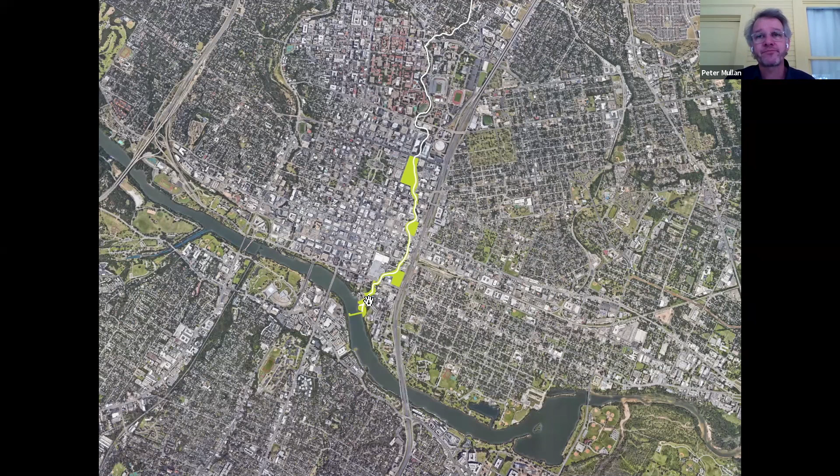We've been talking about Waller Creek as a community for a long time. I don't know if Sinclair Black is in the sessions today, but in his drawing for Austin's creeks in the 1970s he identified Waller Creek as a place for public infrastructure and a mobility corridor. So we've been talking about it for a long time, but really the game changer in this generation is the Waller Creek Flood Control Tunnel, completed in 2015, which now takes 28 acres out of the floodplain on the east side of downtown and enables us to rethink the relationship of Waller Creek and the public realm around it with the surrounding city fabric.

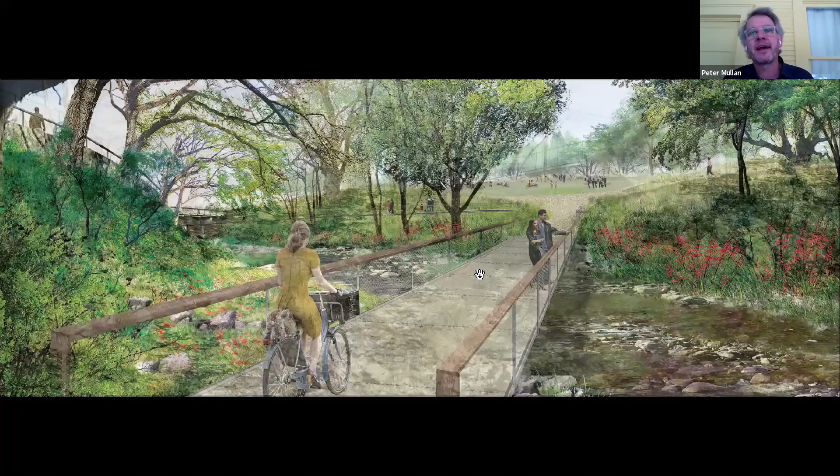Broadly speaking, the building blocks of this project overall are the following. It starts with ecology and the creek itself. The creek has been mistreated and neglected over time - it's probably the most urbanized creek in Austin. You can see how it's been forgotten or in some cases walled off from the city due to the history of flooding. Now that we have the flood control tunnel, we can completely rethink that relationship: take those walls out, bend those slopes back, revegetate them, rebuild the stream bank as a place of nature, and open it up to the city around it. At the heart of the project, that's what this is about - reconstructing nature in the middle of an increasingly urban place.

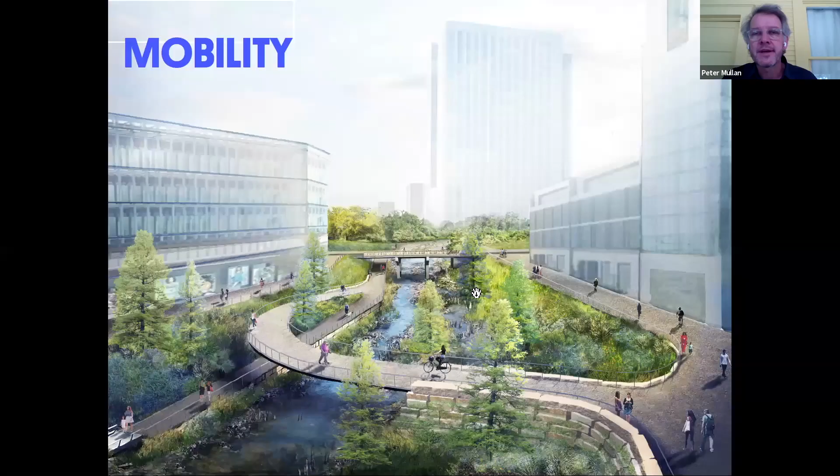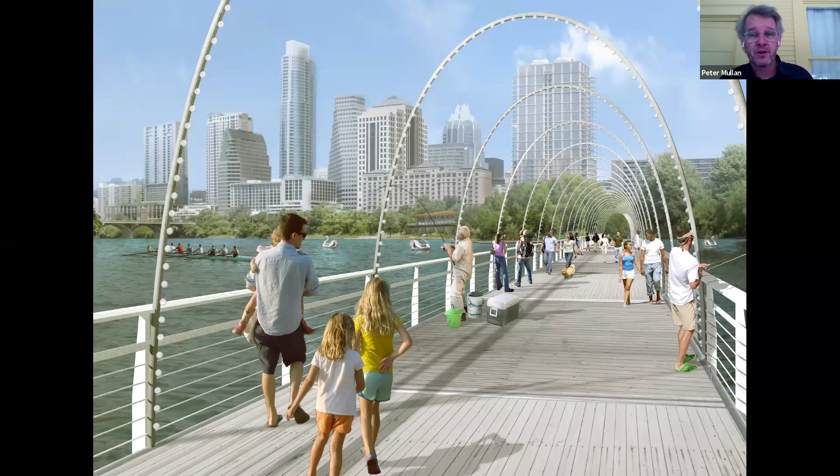The second layer is about mobility and connectivity. Along that natural spine, we're building a continuous pedestrian and cycling trail that avoids conflicts with the street grid, allowing a new alternative mobility infrastructure in this part of the city. It includes a new pedestrian bridge over the lake at the southern end of the Waterloo Greenway Trail. Originally this was designed to be a pontoon bridge - we'll see if that pans out. We're actually collaborating with Cap Metro right now on incorporating this into the plans for Project Connect, for a transit bridge across the lake. I'm excited about Project Connect, as I know everybody on this call is, and will be out pounding the pavement on its behalf. We need transit - now is our time. Little plug there. But we're incorporating this pedestrian mobility infrastructure into that as well.

If you were able to connect to the larger urban trail network in Austin - it's hard to really understand how profoundly these pedestrian connections can change the perception of the city, because they have the effect of essentially shrinking the city in people's minds. Nobody's walking from UT to the lake right now, or to South Austin. But when there is a shaded, cooler, beautiful public pedestrian walkway to make that connection, people will use it. And then it changes everything that happens in between those two destinations. So the possibility of creating this, and the impacts it can have, really cannot be overstated.

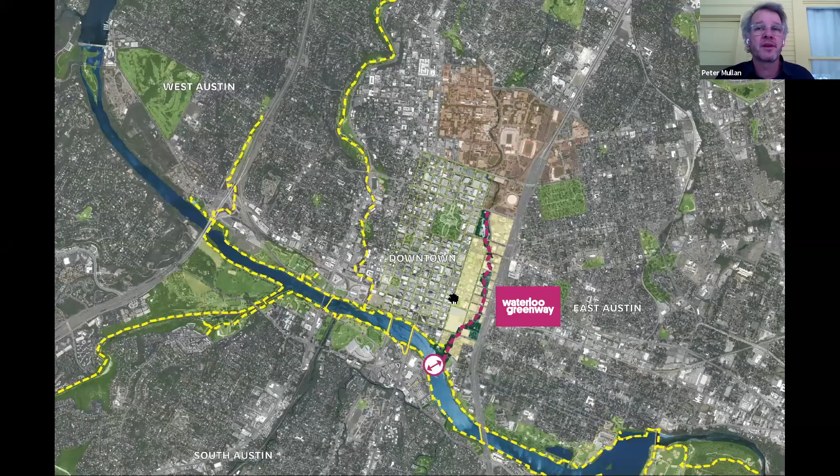So we've got the ecology layer, the mobility layer, and then that spine - that green and mobility spine - connects a series of places and parks along the route, two of which are existing, Palm Park and Waterloo Park, and two of which are new and will be created. Each of these parks has a different character, function, sensibility, and context, but the sum of all of which really creates this rich tapestry of experiences that allow us to serve a diverse public in a diverse set of ways.

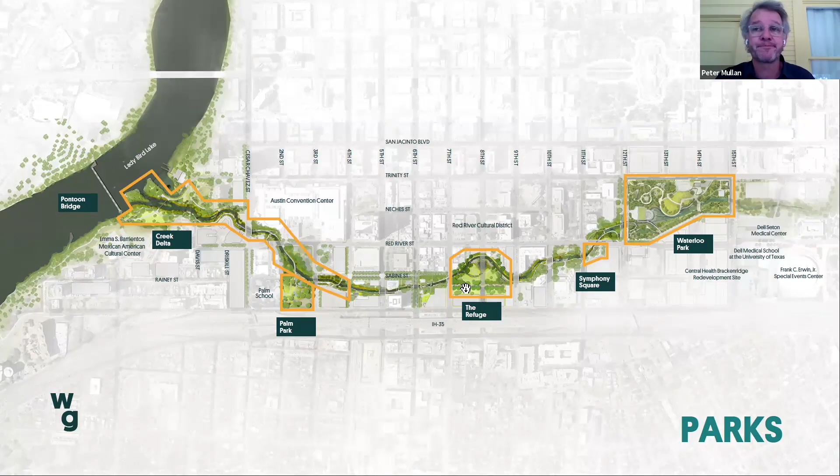And the beauty of parks, as you all know, is that they're so adaptable - they can do so many different things, and they can be places for events and gatherings. It's always a little disconcerting to see these kinds of images right now, but I firmly believe we'll be back into this mode at some point, and we have to look forward to that. Symphony Square is a collection of historic buildings on Waller Creek that's part of our system, and we renovated those buildings in 2018 and have brought programs and events back to that space.

Our organization is not just about building parks and operating parks, but also activating them and programming them, and using programming as a way to make them more inclusive and welcoming.

Creek Show, which some of you on the call may have participated in, is our largest signature program that we have every November. We won't be having it this year, unfortunately. But we commissioned artists and designers to do light installations on the creek, and it's really given people a way to see the possibilities of what can happen along this public corridor. Last year we had 60,000 attendees.

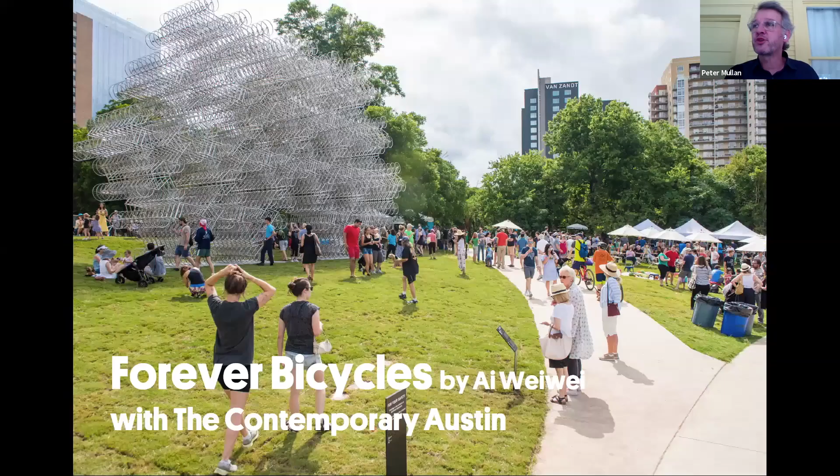Public art, huge part of our program. We have started commissioning works, including Forever Bicycles by Ai Weiwei, which we installed in collaboration with the Contemporary down by the Waller Creek Boathouse in 2016.

But in addition to all that, these parks are places for quiet contemplation and being in nature and just being connected to nature. We've seen the incredible health and wellness benefits, particularly so in the last few months, of these kinds of opportunities and experiences. So in many ways, we see this project as a very large public health initiative that is crucial to the future of our urban city.

And then in between those two poles of large gatherings and private moments, there's everything that you can imagine in between, and everything that you can't imagine. The beauty of parks is that people make them their own. They don't do what we prescribe for them. They do what they want to do, and that's their beauty, is that they are these kind of open-ended platforms for the collective creative expression of the community. That's really our goal: how do we actually make this a place that can serve that purpose and design it in a way that facilitates that.

Over the course of the past few years, we've also recognized that we cannot look at that as a passive activity, and that historically these parks and places have not always served the public equally or equitably. We as an organization need to be very conscious about those disparities and do what we can to overcome them, so that this is a place that serves everybody and welcomes everybody. To me, that's their real value: if this is a place where the entire community comes together, that's how we build a common sense of our humanity and community, and our connectedness to each other. That's part of why having this broad sense of a constituency across the city is so important to us.

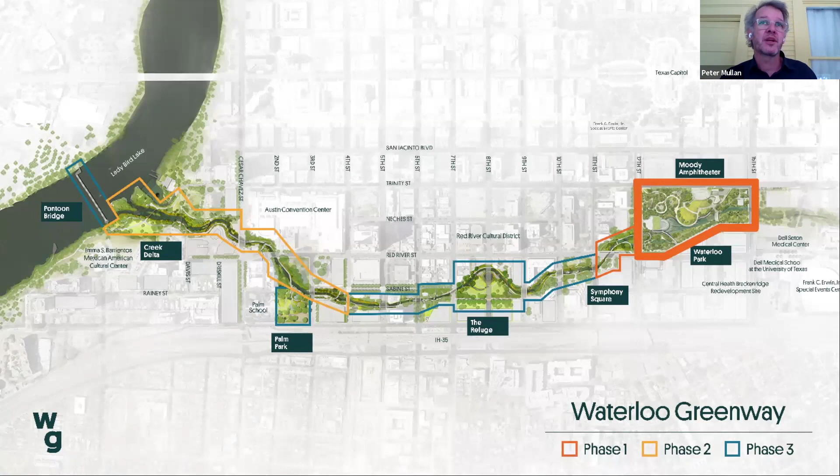So that's the big idea: ecology, mobility, park spaces for coming together, and doing that for the entire city. In terms of implementation, we have a phased capital project. We're under construction on phase 1 up at Waterloo Park at the northern end. We are already in construction documents on phase 2 at the southern end. So we have a kind of rolling construction process. We hope to be in construction on phase 2 next year, with the goal of having the entire project complete by 2026, 2027.

One of the reasons we started at Waterloo Park at the northern end was that it has all of the different components of the larger project embedded in it. There are large gathering spaces. There are areas where we're restoring the creek. And there are park spaces of a variety of scales and sizes that allow us to serve the public in a variety of ways right out of the gate.

So in some ways, as a demonstration project for the larger project, this is a way to show people what's coming. We've frankly realized that for a large part of our community who don't read plans and architectural drawings, having a place that they can experience is going to be the thing that changes the perception of the project as a whole. So really looking forward to sharing this with the public generally and broadly.

So I want to go through a little bit of history of the evolution of the design. It's pretty interesting to see how it's evolved over time, and I think you'll see some of the themes that emerge in that development. Let me go back because I forgot to mention: part of the center of the project is the Moody Amphitheater, which is a fully functional 5,000 person outdoor amphitheater.

So we have a programmatic anchor, which I think will also attract people from a larger radius around the center of Austin. That's one of the themes embedded in the evolution of the design: taking a place that was, consistent with some of our historic parks in Austin, not intensively designed. We find these public spaces with natural resources and features, but we've never designed them as urban places. So part of the goal around Waterloo Park is to create a truly urban park that has a lot of features, amenities, and experiences packed into a smaller footprint.

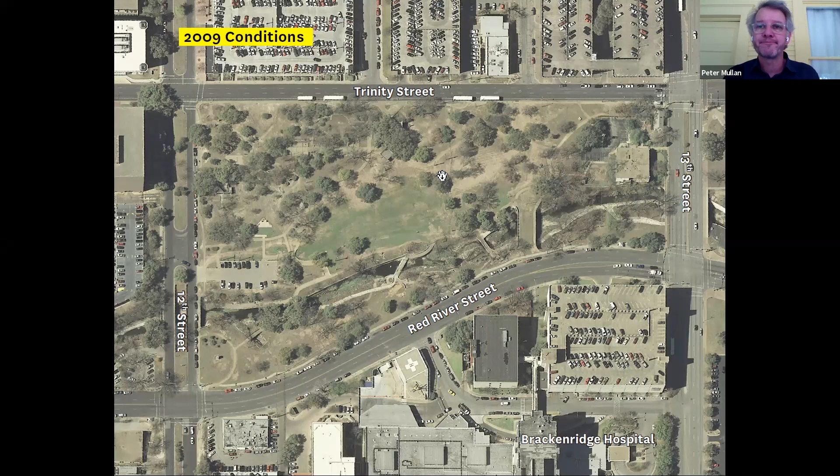This site is the site of the inlet facility for the Waller Creek flood control tunnel. Again, this is kind of the pebble in the lake that has a series of ripple effects that inform a lot of what we're doing.

It's a giant piece of infrastructure in the middle of the park, and a lot of the design is about how we respond to that and also get inspired by it. Waller Creek is about flow and the flow of water, but landscapes are also often really about flow—the flow of surface through space in three dimensions. The tunnel, in some ways, is like this thing that has interrupted the natural flow of the creek and the landscape, but that spawns a whole series of geometric and programmatic reactions.

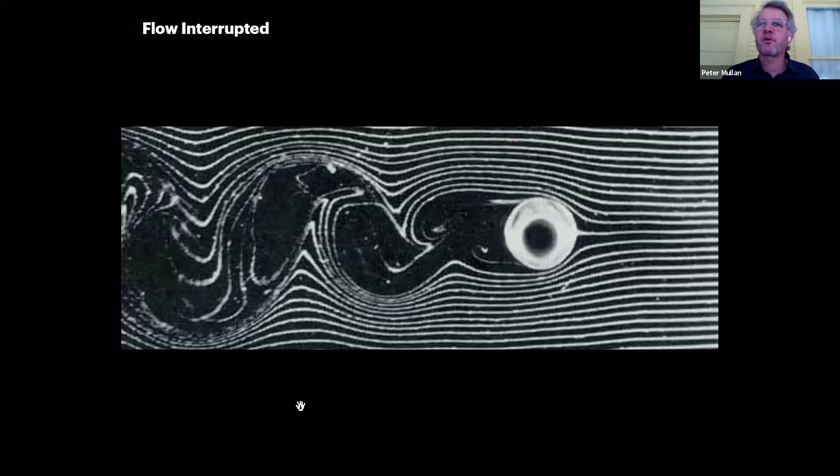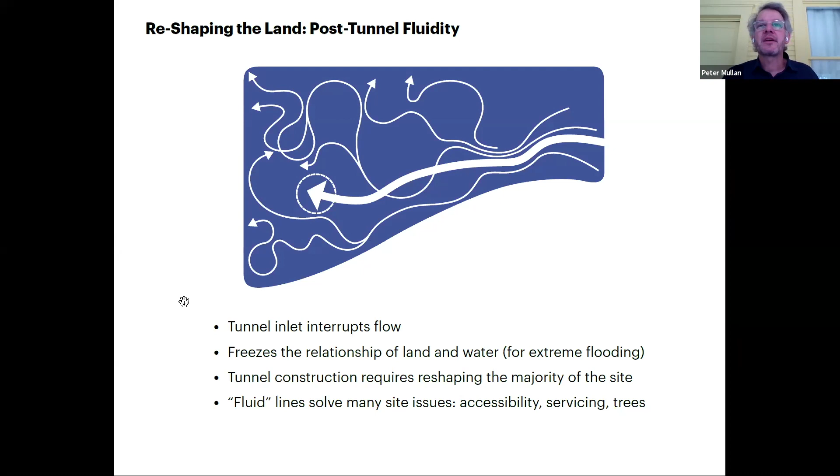The idea is that out of that interrupted flow come a series of pathways that meander their way through the site fluidly, and those pathways then create a series of places—kind of eddies along those paths—that both navigate the topography and create programmatic opportunities along the way.

So, going through a bit of history on the evolution of the design. I actually want to thank Ingrid for this opportunity, because you don't always get the chance to get into this level of detail in the design process, and I thought this was an audience that would appreciate it.

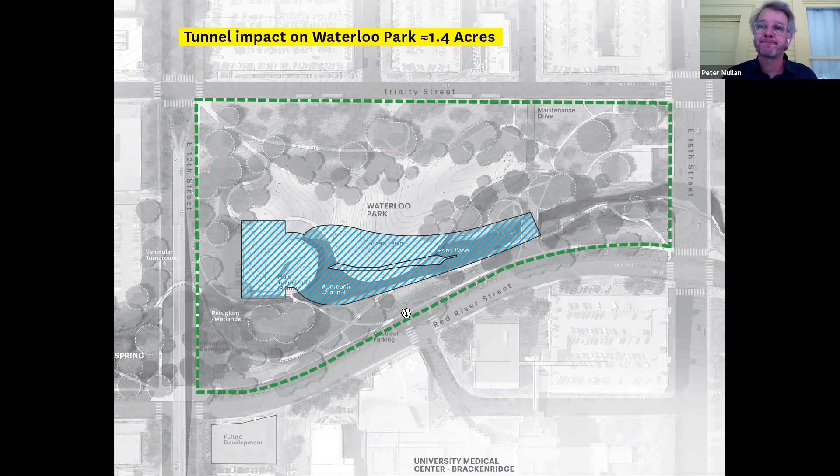So this is the park overlaid with the tunnel construction, with the inlet facility, and then the pond that flows into the inlet, into the tunnel. The first big move the design team came up with was basically to build the park out over the pond, to kind of take the park back from the tunnel. So instead of having a piece of infrastructure with a bunch of green around it, we now have a park with a large piece of infrastructure in it.

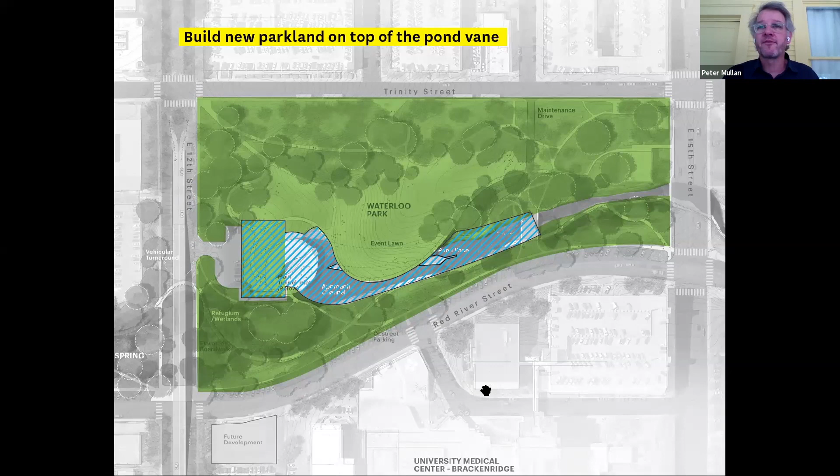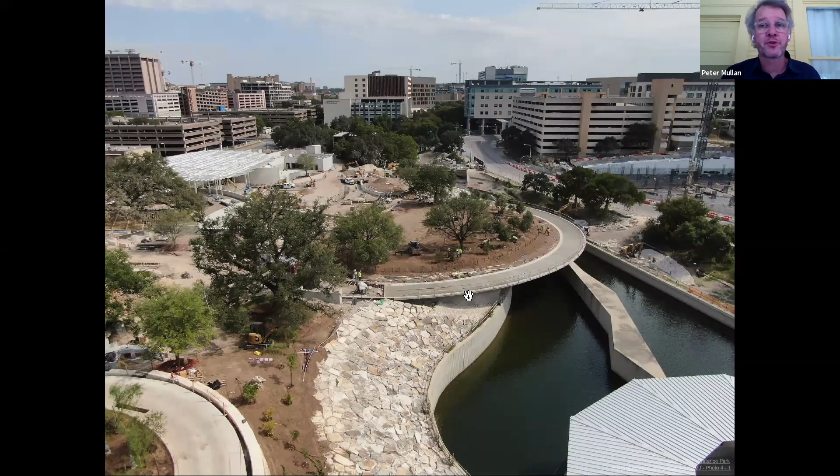So inverting that relationship—here you can see the lawn, the flying lawn that extends out over the pond, the disc-shaped lawn that's now complete, and there it is from above. Really, again, taking the park back from the inlet facility and creating a whole series of other programmatic opportunities. Once that move was done, the question was how do we actually carve out spaces within the park, knowing that this is the biggest park in the chain, that this could be a gathering space for the center of Austin.

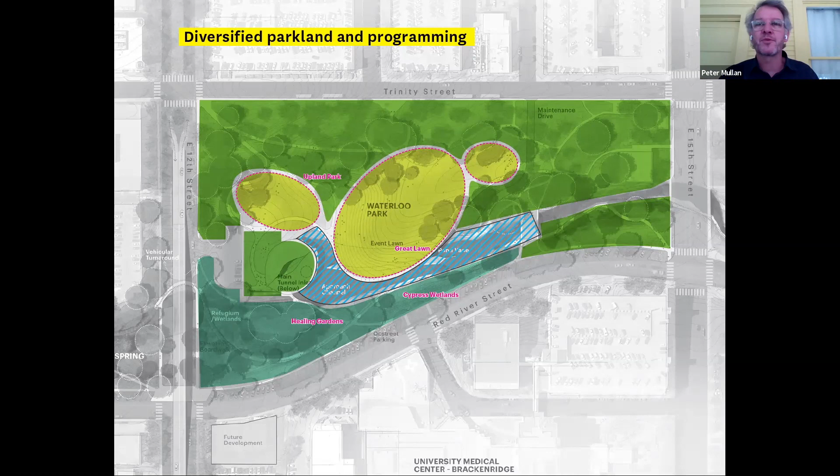I've been reminded by folks who worked on the Music Commission back in the 90s that people have been talking about a 5,000 person amphitheater in downtown Austin for a long time. So we were happy to be the recipient of that vision, and also the idea of creating an architectural anchor in the park that could have symbolic value.

That would mark this place and make it a destination architecturally. Out of that was born, in the competition design, Tom Phifer's vision for what was at that point called the Poppy, which really was a sculpture as much as anything else, a place for gatherings, but without any specific programmatic function—just the idea of a visible architectural element in the park that would be an attractor. That was the genesis of the idea of a piece of architecture in the park.

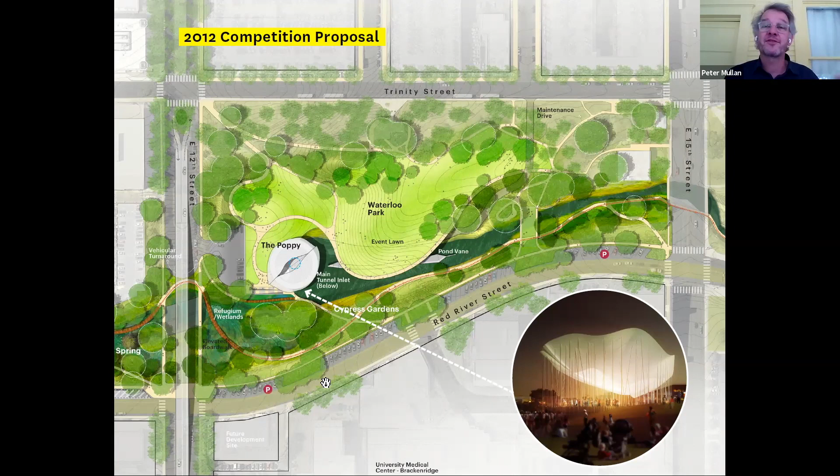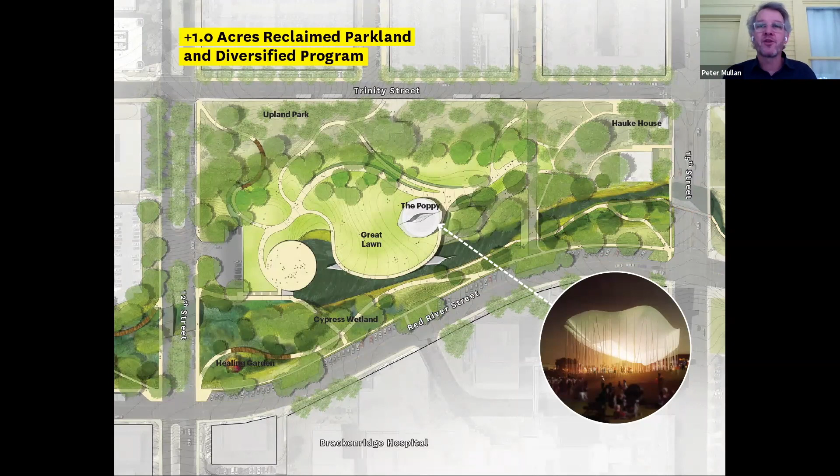Over time that has evolved both in terms of location and function. It started out on top of the inlet facility in the competition, in part to hide it, but that wasn't possible functionally or programmatically—we know the inlet facility has had some history. So then the Poppy started to move, and we saw a whole series of progressions in the development of the plan around the location and function of that architectural element.

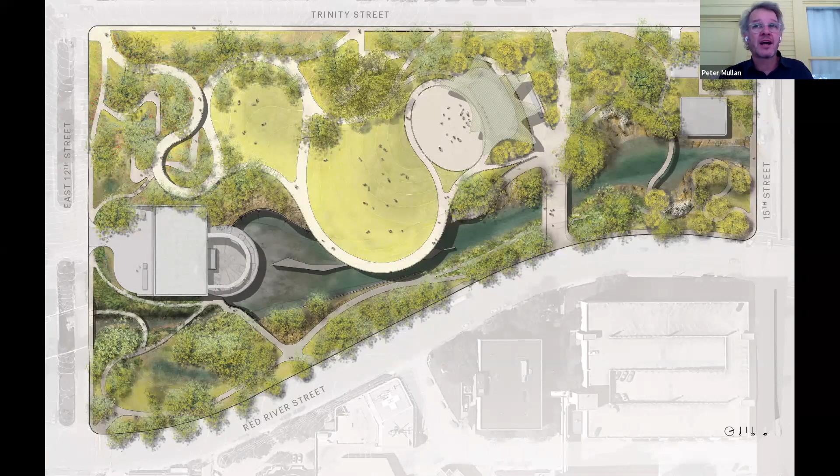Jumping ahead a couple of years, the Poppy had transformed into something a little flatter and started to gain more programmatic functionality, recognizing that just having a pavilion was great, but having one that could actually host concerts and performing arts events would be better. So this idea emerged of an organic, distinctive leaf-shaped structure, essentially a tensile fabric covering around a steel frame built on a series of large pillars.

One of the things you can see is that this is still very much just a shell—it's not a building yet. It's kind of floating in the landscape, and the landscape is very Arcadian and beautiful, but hasn't really come to terms with the programmatic realities of being a performing arts space.

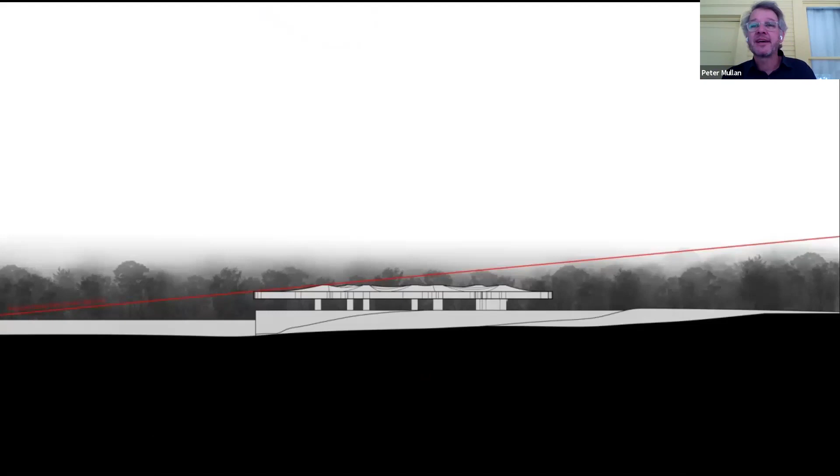The other thing is that as that was being developed, we recognized we have to deal with the Capitol View Corridor, which limits the height of the building. So the idea at the time was that this building would actually be on hydraulic lifts, so that during park mode it would be below the view corridor, but for a show the whole structure could lift up to provide the height and functionality required. Once we dug into the legality of that, we realized it was questionable within the state's Capitol View Corridor ordinance, so we had to rethink things a little bit.

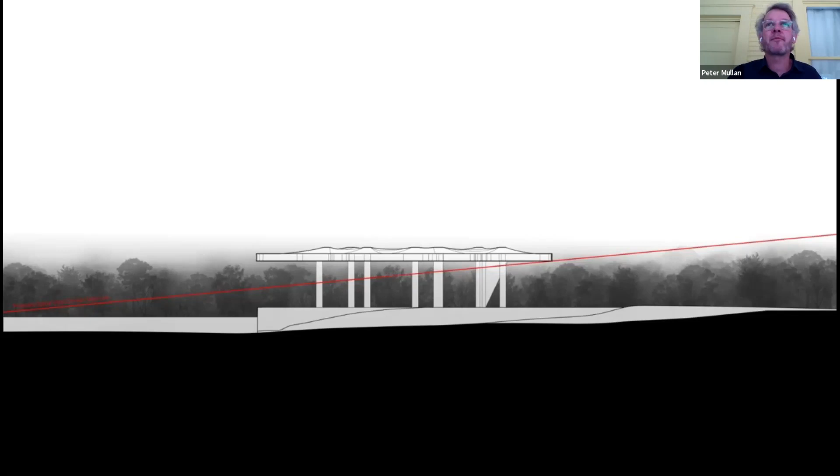We also realized that if we're going to build this kind of facility, we should really do it right. The thing missing in Austin is a performing arts venue with infrastructure built into it. We have a lot of spaces where we do festivals and bring out temporary infrastructure, but that tends to have a really destructive impact on our parks. So if we could build in some of that infrastructure permanently, it would facilitate the performing arts program and reduce the impact on the park itself.

That led to a couple of things: the development of the amphitheater as a building, and moving it slightly north along Trinity Street to maximize the amount of height we could get underneath the view corridor. That became the defining element for the location of the amphitheater and the development of the building around which the landscape could be shaped.

That's a bit of an overstatement, because one of the hallmarks of this whole design process is that the building and the landscape are really integrated as one. That's been a primary goal for us all along, in part because we wanted the landscape to always be the primary experience. So the building had to function sort of as a piece of landscape, but also so that when we weren't in show mode, it wouldn't feel like a place that was empty, lost, and forlorn.

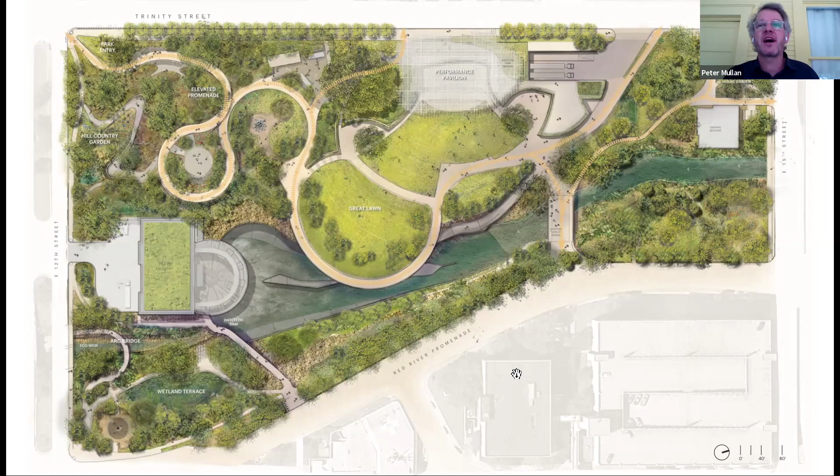That really felt like it was part of the park. So this idea of a park-first design strategy emerged.

I want to talk about the evolution of the amphitheater building and its architecture. This is the roof plan, and underneath the building is a plan that includes all the functionality for this kind of program: green rooms, dressing rooms, bathrooms, concession areas, loading dock, crew areas, catering, etc. All of that is built underneath the landscape, embedded into the topography of the site.

That allows us to create a whole series of roof terraces and landscapes that cover it on top, and those are all occupiable, so the building becomes part of the landscape and a landscape unto itself.

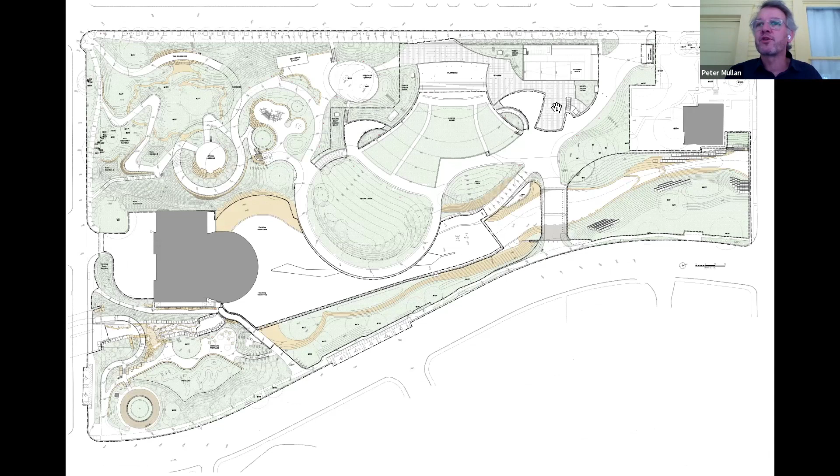This is the landscape plan that is being built. You can see the Great Lawn in the middle and the outline of the amphitheater building. Much of it on the south side of the site is built into the hill, and then it starts to emerge out of the hill on the north side with the loading dock and these roof terraces.

The form of the amphitheater structure has evolved quite a bit over time. The inspiration was really how do we create something that can mimic the effect that the tree canopy has in the park, allowing light to filter through it so that it's a kind of ephemeral thing and not a big, heavy structure.

Looking at some art for inspiration on how to take that idea and abstract it. Agnes Martin and her incredible canvases that have, in spite of their minimalism, this incredible depth and a way of capturing the light and refracting it.

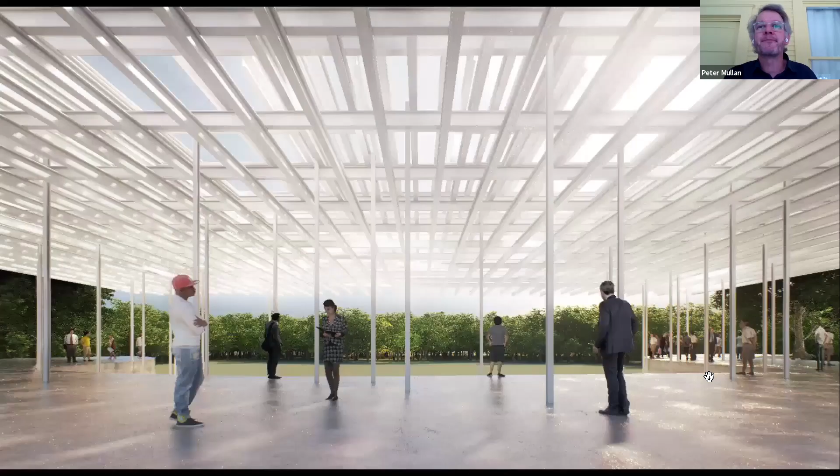So the building and canopy structure becomes almost like a light fixture itself, taking that abstracted tree canopy and making it into architecture. But when you get far from it, it's something that is floating, a little bit like a cloud. We're trying to dematerialize the architecture as much as possible.

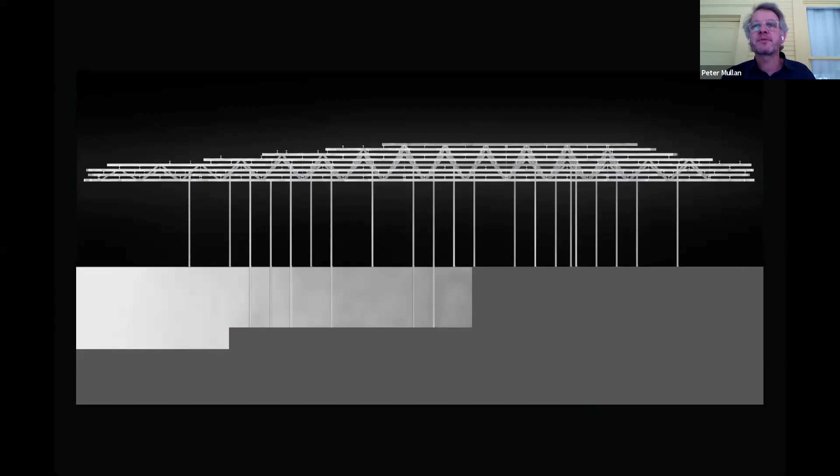The scheme was to create this multi-layered trellis of steel beams, actually 16 layers stacked on one another, using very small individual members so it has a kind of delicacy—6 to 8 inches in depth—but combined together they could provide the structural capacity both to make the necessary spans and to hold up the rigging and equipment required for performances.

That structural methodology and typology also allowed us to be playful about the shape of this and more organic about it, looking at different ways the plan profile of the amphitheater structure could adapt and respond to the landscape around it.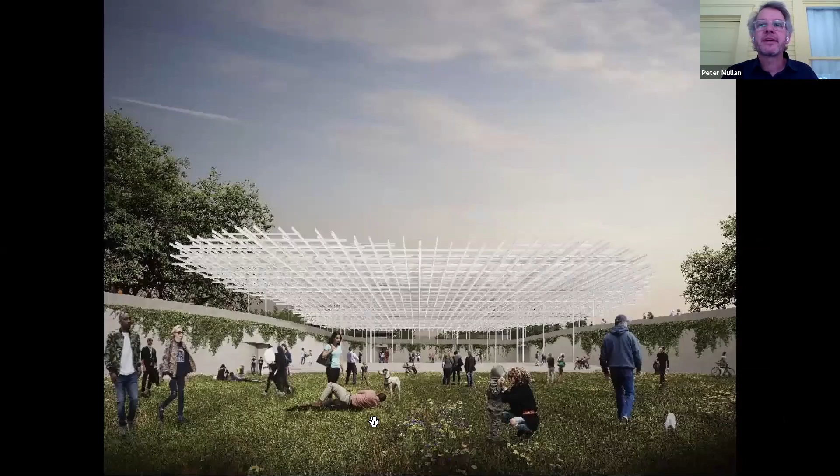We ended up with this organic form that hovers over the base building housing all of the programmatic functions of the amphitheater, but it becomes a park pavilion usable by the public all the time, not just in show mode, but as part of the park.

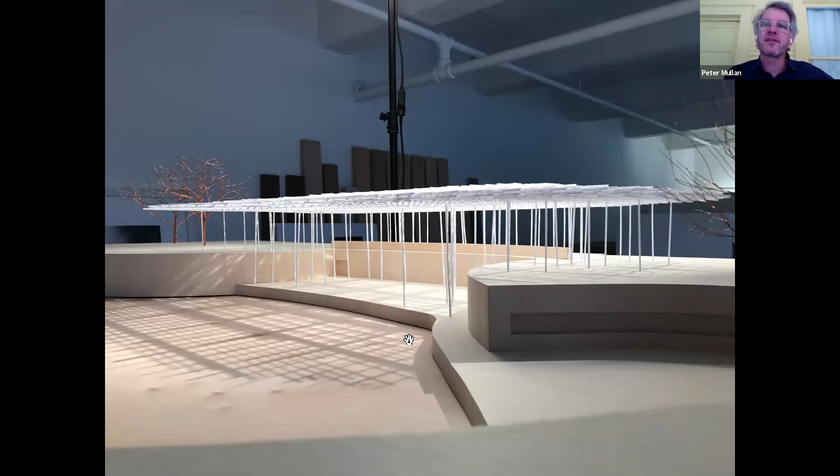Here are some model shots, all done by Tom Phifer's office. You can see how this structure allows us to have a very thin profile, which was about getting underneath the Capitol View corridor, and how it starts to capture the light and how it looks from different angles. On site you have the ability to see these different views of the structure—it's visible from all sides.

We're under construction. This is a recent photo from a few weeks ago—you can see the canopy structure that's built, the curved concrete walls of the building underneath housing the different spaces, and the landscape around it.

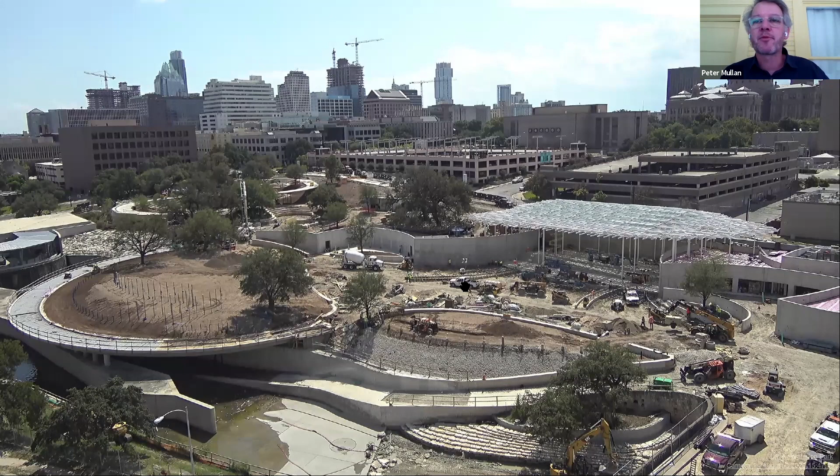I got a lot of construction photos, so I'll take you through the site. We're in the shadow of the Capitol, a pretty spectacular site here—somebody said it's a little bit like the backdrop at ACL, but in reality.

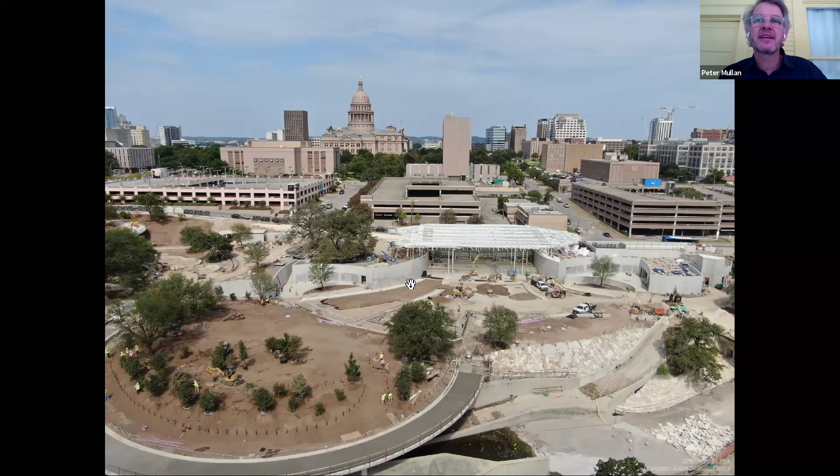This is taken from Monday, and you can start to see that a lot of the form of the amphitheater area and the great lawn are now coming into shape. We're putting in soil, and trees are being planted, so the form of this is really now finally coming together.

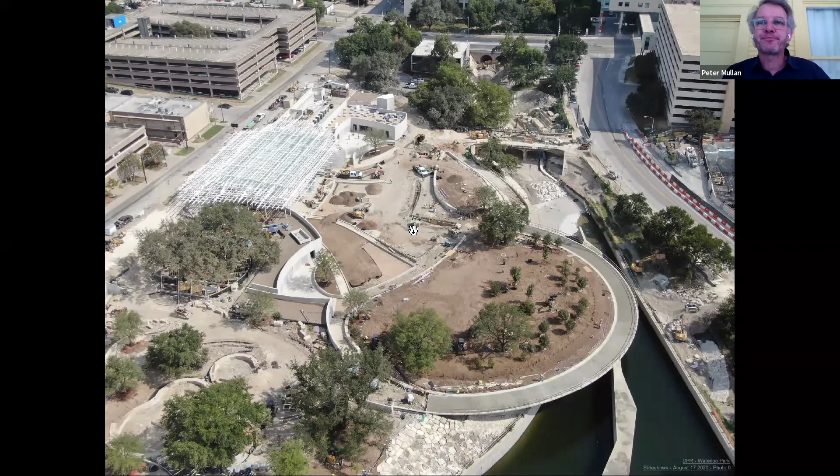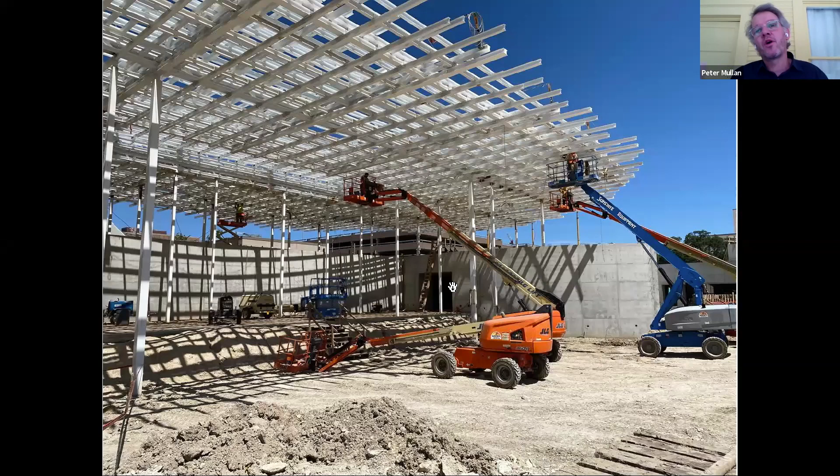Here's a view of the structure coming in off of the 14th Street Bridge, with the concrete walls underneath. You can start to see the play of light coming through the structure and within the trellis itself, constantly changing depending on time of day and where the sun is. Sometimes it's backlit, sometimes lit from the front. Because the walls underneath are curved, you get these warped shadow effects, which are really beautiful. This is a view from one of the roof terraces looking down onto the stage.

All of this will be open to the public during normal park hours, and when we have a show, we'll put up curtains around the stage to screen off the performers from above. There are stairs and a ramp that come down off the stage onto the lawn, so again the stage is publicly accessible during normal park hours.

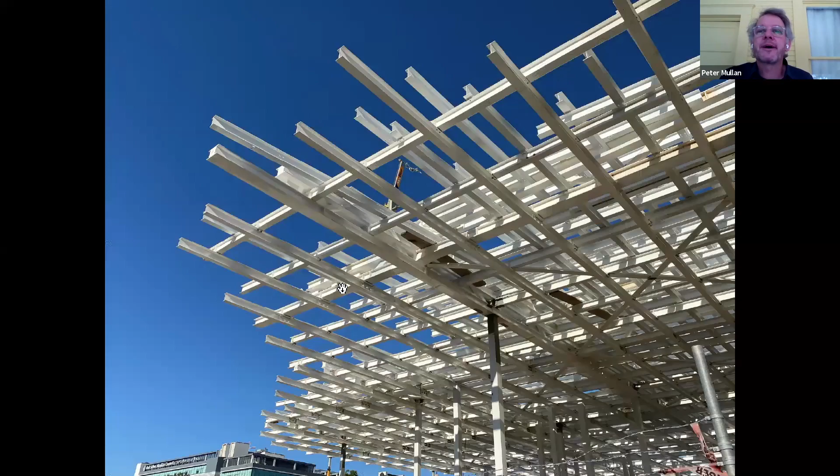Again, you can see some of the details of the structure and how it floats above those curved walls. The curved walls, which will have vines growing up them, really just become part of the landscape and part of the earth.

One of the great things about construction is some of the details of the experience that you really never talk about during the design process emerge as well. Seeing the shadow of trees being cast onto these curved concrete walls is not a view we ever saw during the design process, but just really beautiful moments that can now be experienced on the site.

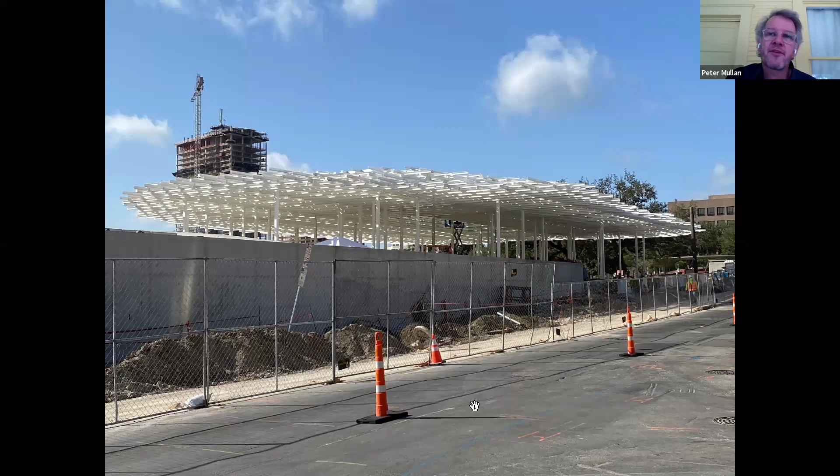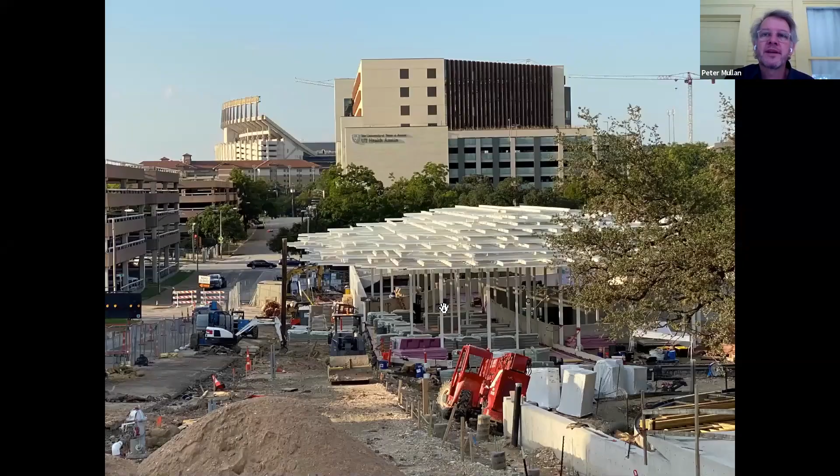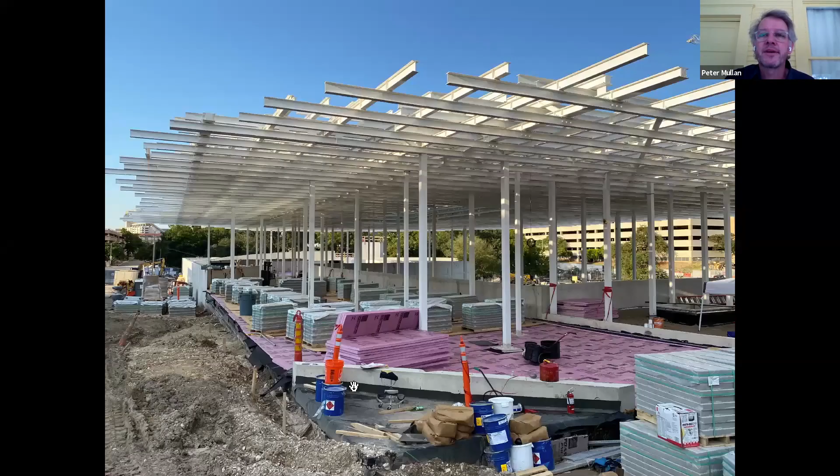As I said, there are all these different perspectives you have on the structure. This is from Trinity Street looking south, and you get this view from underneath, this sort of floating cloud with the light coming through it. But from the south looking north, you're actually above it, and you get a totally different view of all these individual beams with the UT football stadium in the background. In the middle, there's an at-grade connection with Trinity Street onto the roof of the building.

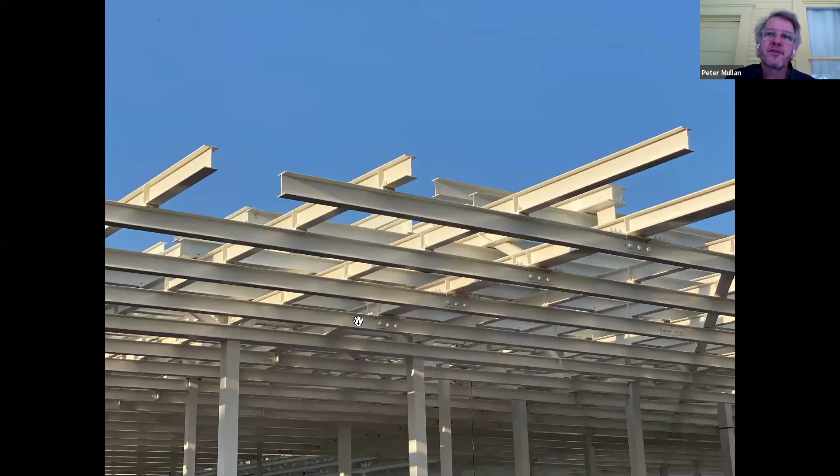This is one of the entrances into the park, where you come in underneath the structure, and there's a series of stacked beams. As you get closer, you really understand the dimension of those, and there's a much more intimate feel. But then at night in the sunset, the canopy gets lit up. All these little beam edges get lit up, and you start to see the three-dimensionality of the structure.

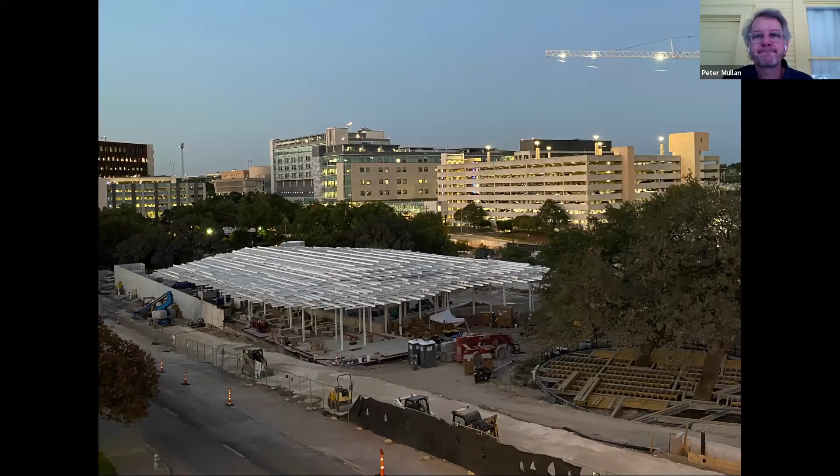So that's the amphitheater part of the park. But then to the south of that, there's a whole other experience, which is about something completely different from the amphitheater itself. It's really about being immersed in a landscape at the same time that you're in the middle of the city.

We have a lot of topography on the site. There's a huge elevation drop from Trinity Street down to the creek, and the design is really centered on taking advantage of that to create a really rich variety of experiences of the landscape. So there's this curved serpentine walkway that curves through the site, I'll show you some more images of that, which then defines a series of places along the way.

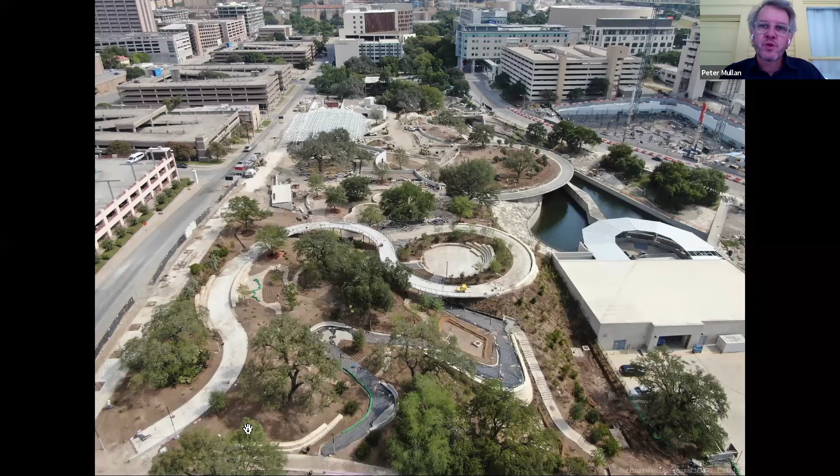There's a secondary path that winds its way down through the hill. Again, all of that is accessible to create an easy way of navigating this very steep hillside. But everything else in between is all planted as a really rich, robust landscape, and we call this the Hill Country Garden—this is really about how do we bring the hill country into the city.

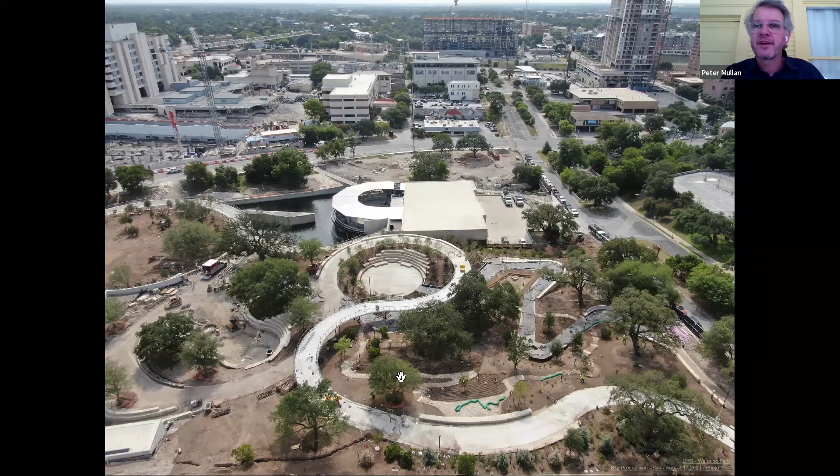Here's another view of that same garden looking east. That's the inlet facility in the background with the walkway coming down, and then the Hill Country Garden here. We've got a critical mass of landscape here that will, in certain places, let you lose the city entirely. I think this will be a really powerful experience to step out of the city and be in this really lush landscape.

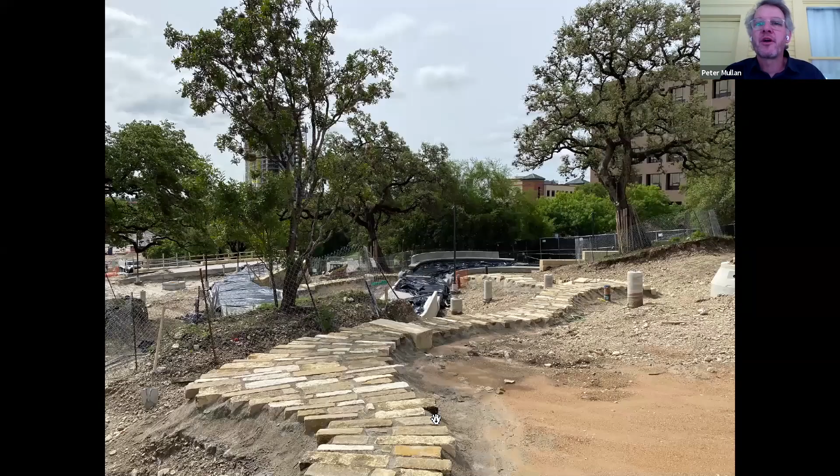There is what we call a limestone scramble that weaves its way through that landscape, really for kids, as a way of experiencing and exploring through that landscape. We also have a series of lighting in the landscape so that it can be lit and experienced at night. We're downtown, so we know we have a nighttime experience, and that's part of the landscape experience as well.

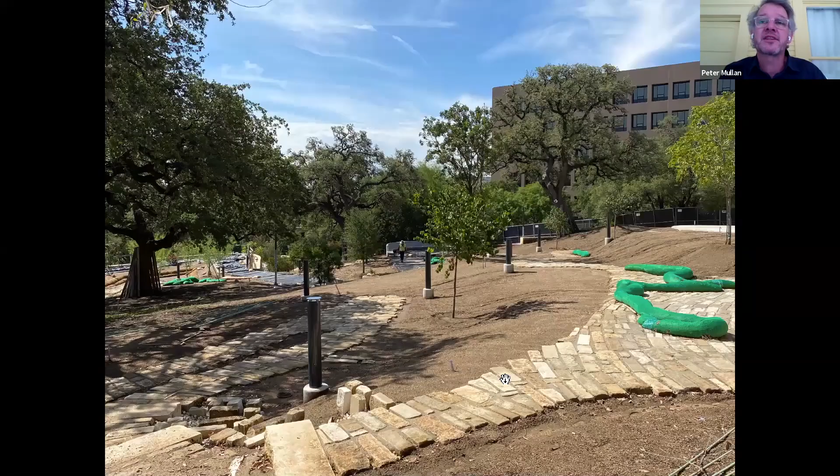There you go, you see these lights called firefly bollards. They're perforated, so they have a kind of atmospheric quality in the landscape. All of this will be planted out with a series of grasses, perennials, and shrubs.

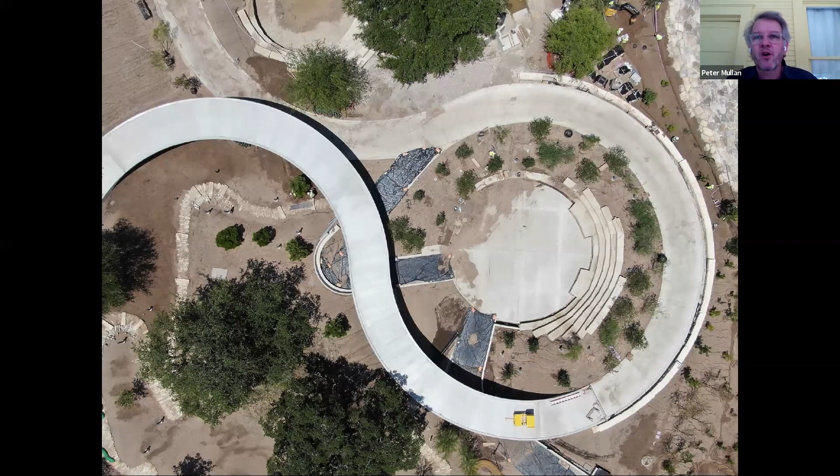The serpentine walkway navigates through the site, going back to the original design idea of flow and flow interrupted, spawning a whole series of curved walkways. That formal device is employed in a variety of ways, shaping and carving the landscape as you move through it.

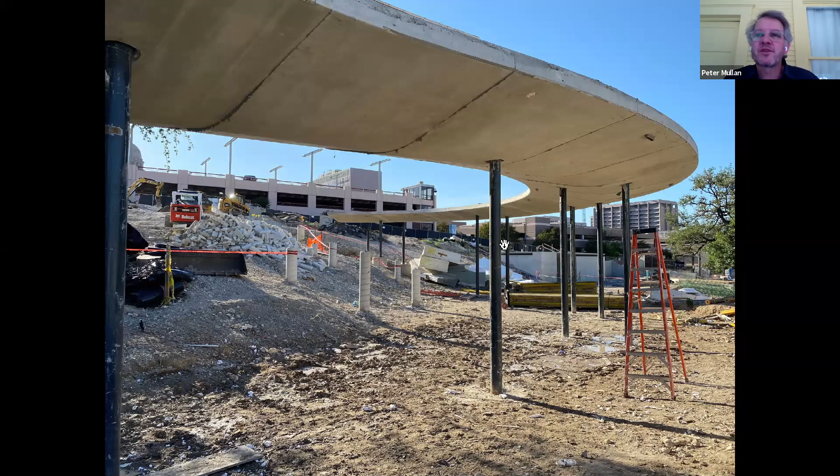So the walkway starts on the ground and then becomes this elevated structure, so you're kind of floating in the tree canopy. Then you have these expansive views out over the rest of the park. It comes in and winds its way back underneath itself, sitting on a series of interspersed small columns that will be surrounded by plantings and kind of disappear into the landscape.

I want to give a shout out to the folks at AEC, Architectural Engineers Collaborative, for their design of the bridge itself. It has this curved belly shape with a very thin profile at the edge, which gives it an incredible sculptural quality.

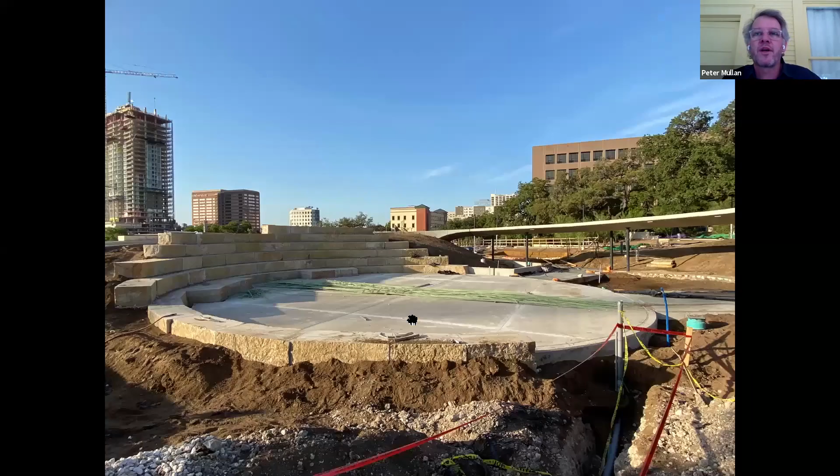As the walkway comes down, it creates a series of spaces, including this mini amphitheater, where we have a series of stone seating steps available for smaller programs, but also street performers and buskers, all visible from the walkway as it winds down around it. There's also a view from underneath the walkway looking at that plaza.

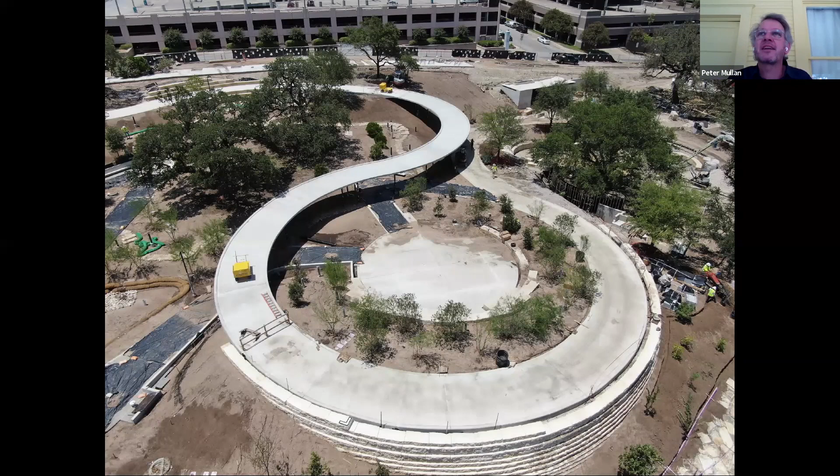There's another view of the walkway curving around, creating that space as it moves down. So there's a lot of shaping of the landscape, creating this hill that facilitates a meander through the site. I think one of the hallmarks of the design is recognizing that the experience of landscape can be choreographed. It's not just something that's found, it's something that can be a designed experience, and bringing that to the design of this park.

As the walkway winds down, it comes into the middle of the park, where there are a series of play structures embedded into the landscape. It's not a playground per se, but it's a signal to kids that the landscape is something to be played in, an invitation to explore and discover the landscape.

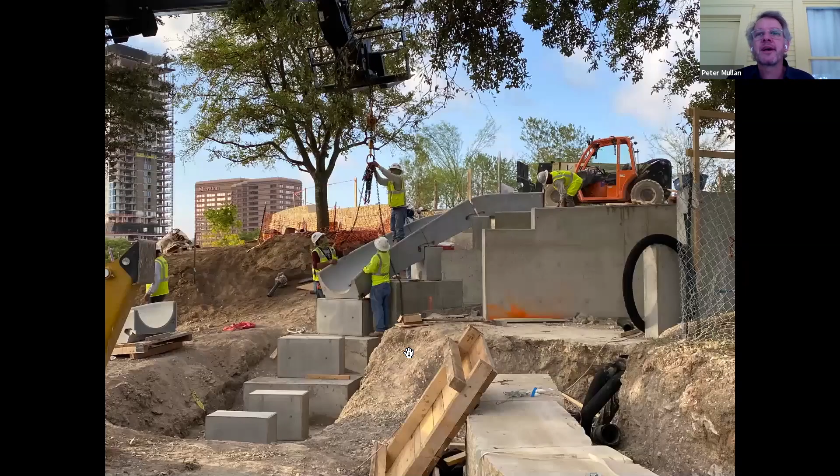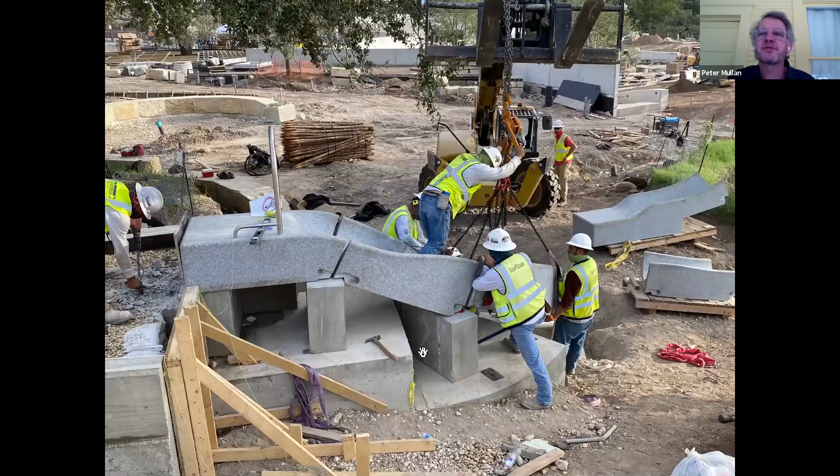One of the elements is a granite slide, CNC milled out of granite, embedded into the hillside. The hillside will get built up around the slide with limestone and plantings. You can see them assembling it into place just last week.

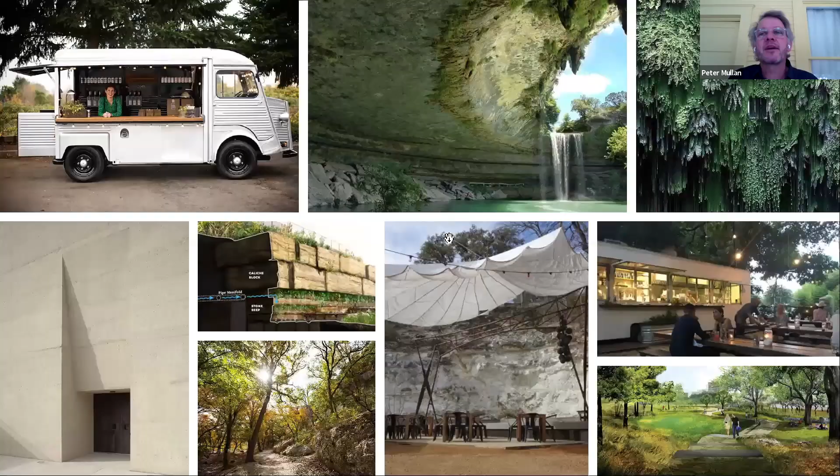That same center area of the park is where all those play structures are. Just to the west of that, we have a public restroom building and a series of hookups for food trailers being designed by Michael Hsu's office. I want to give a shout out to his team, Maya Kreischman and Andrew Bell, for their work on this—a really beautiful piece of work.

We started out with the idea of having food service amenities in the park, and initially considered building a full brick and mortar restaurant. We went out to the community, and they said it would be much better and more Austin if we could do something with a lighter touch. So we have hookups for food trailers, and we're providing public restrooms to support that—all built into the landscape.

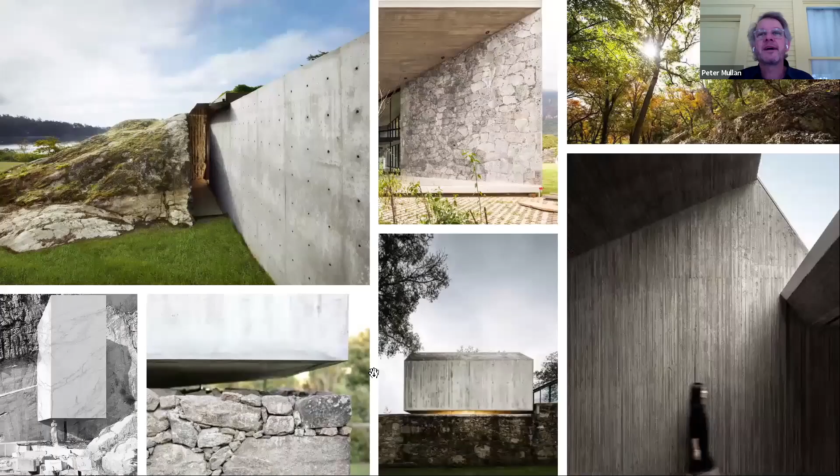These are some of the precedents for how we could take a piece of architecture and embed it into the landscape, making it almost of the landscape, but with a clear material distinction between the built architecture and the natural landscape around it—having those two elements in a kind of material dialogue with one another.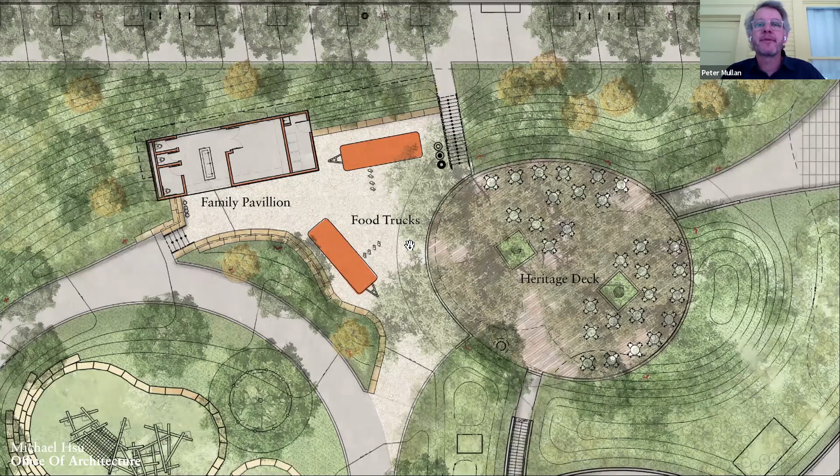So here's the plan. You've got the pavilion that's embedded into the hillside here. There are hookups for these two food trailers, and then there's a big wooden deck under two large heritage trees where we can have flexible seating. And then the play area is just adjacent to that.

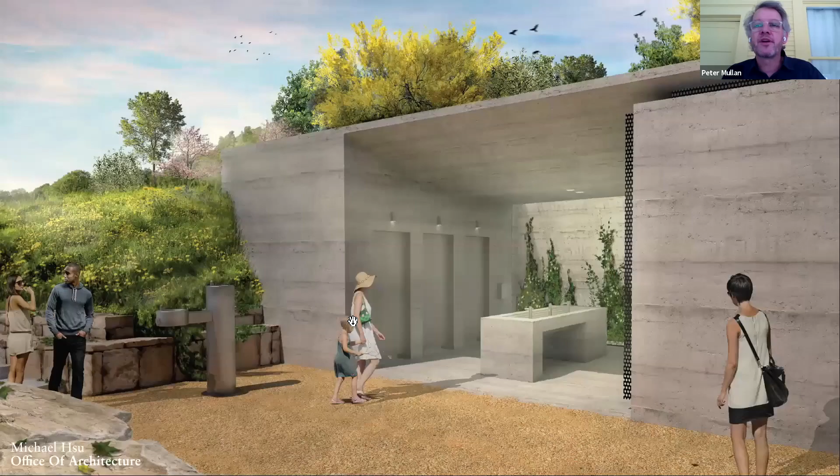So that's a rendering of the building. Again, it's an incredibly beautiful, minimalist structure, cast in place concrete with this kind of knife edge roof detail and a clerestory window. In the middle of these two sides of the structure, there's a breezeway with a common wash basin sink, so a very inclusive bathroom design. At the back, there's a skylit planter so you really feel this is part of the landscape, and there's this very intense relationship between the landscape and the building.

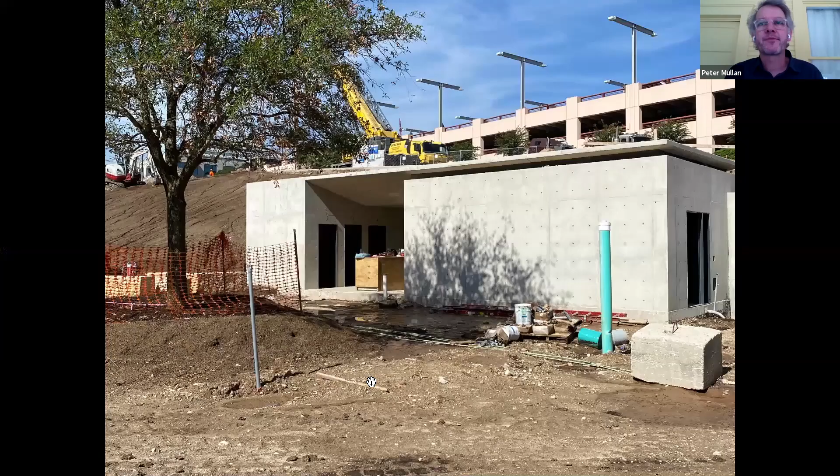So that's the structure, a recent construction photo. Really, it's just an incredibly beautiful small building. You can see the clerestory detail there and how it's embedded into the landscape, and then how from the inside, the roof kind of floats up above the wall structure. And then that's that breezeway with the cast in place concrete sink in the middle.

That's coming. And then adjacent to that, there's a large wooden deck underneath the trees. Again, this is all on the main path into the park, so it will be an integral part of the circulation experience. So we've got this hub of activity right at the center of the park, a place that will be activated all the time.

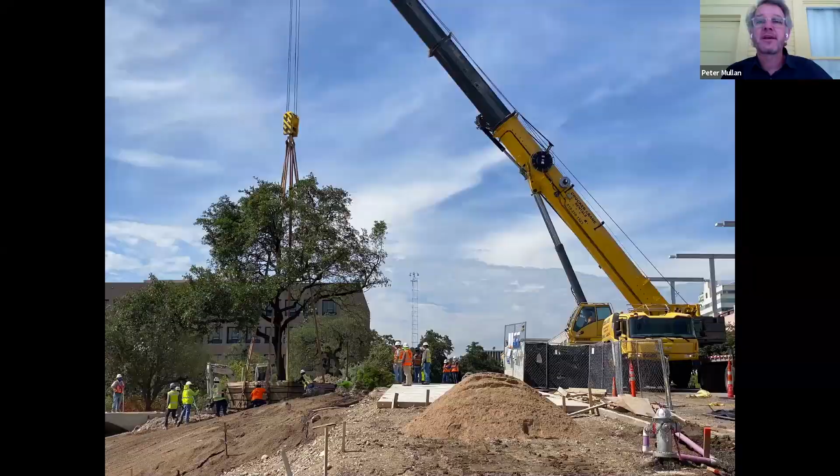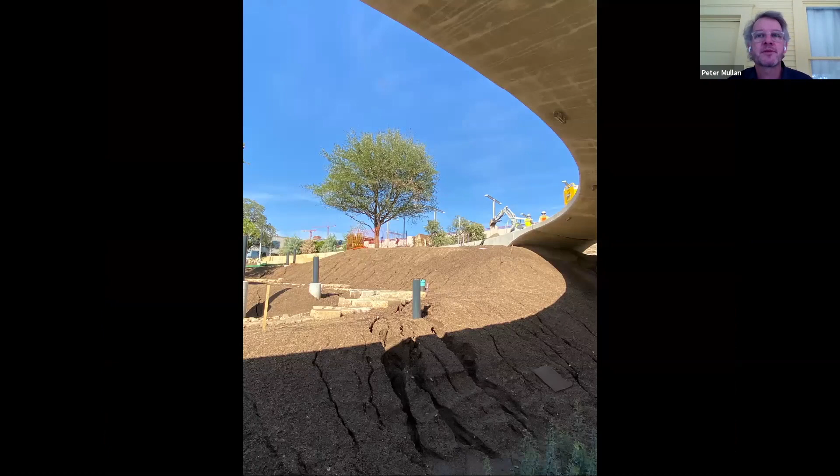We are heavily into the planting right now, where Cleanscapes is our landscape contractor, and it's amazing to see what they're able to do. We've actually transplanted a lot of trees within the site, and also received some from outside of the site. We got two heritage trees from UT, one from the Capitol complex, and one from an adjacent development. I think these are really adding a sense of permanence to the site that a new landscape sometimes doesn't have. You can see these large trees have been located strategically to anchor and define the various spaces of the park.

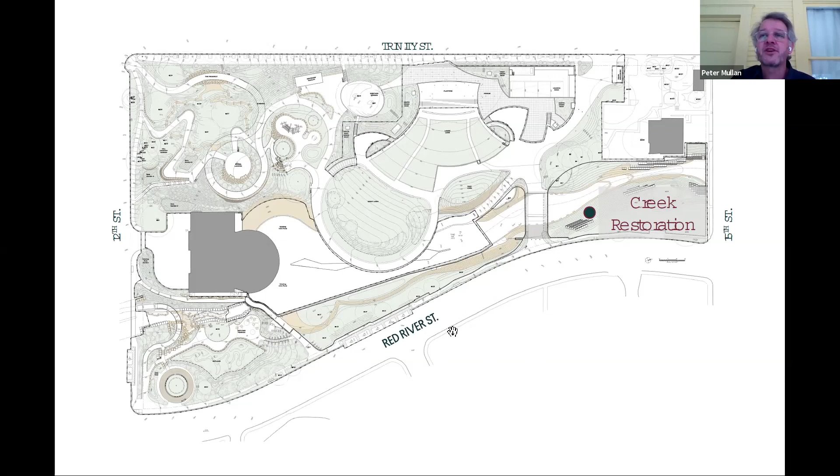differentiation in flow levels. And so we've actually taken the path out of the creek and moved it to the top of the bank. As part of the construction of the adjacent site on the Central Health site, Red River Street, the existing Red River Street will be pedestrianized, so that becomes part of the larger trail network of the project. And there you can see that existing trail that we're taking out.

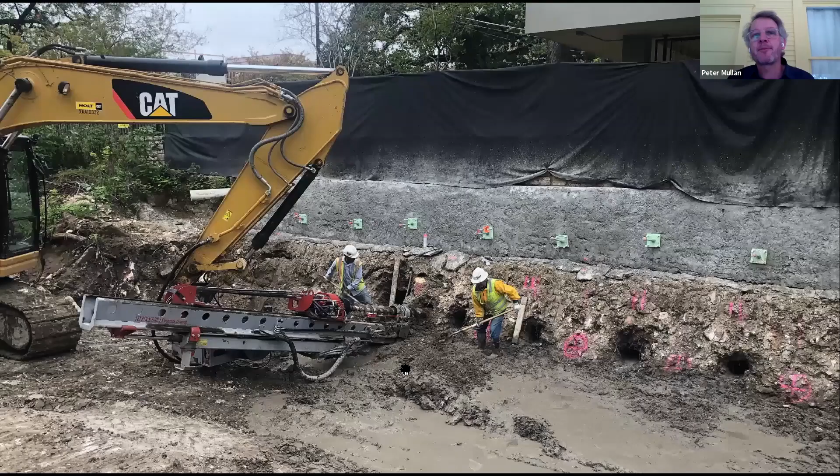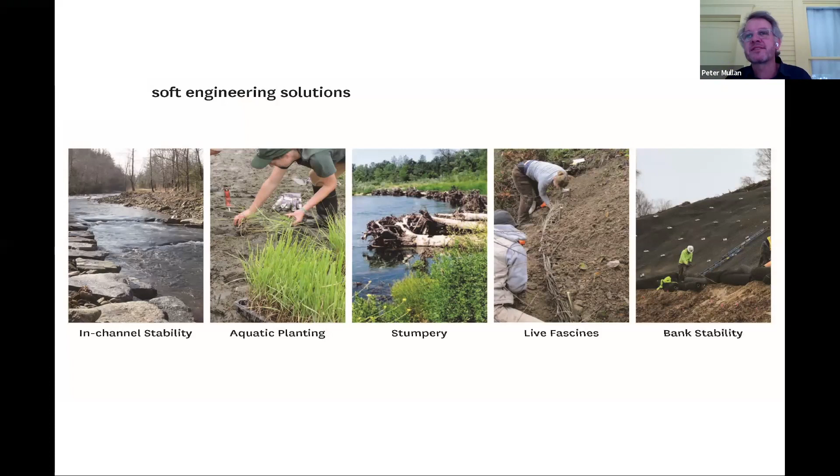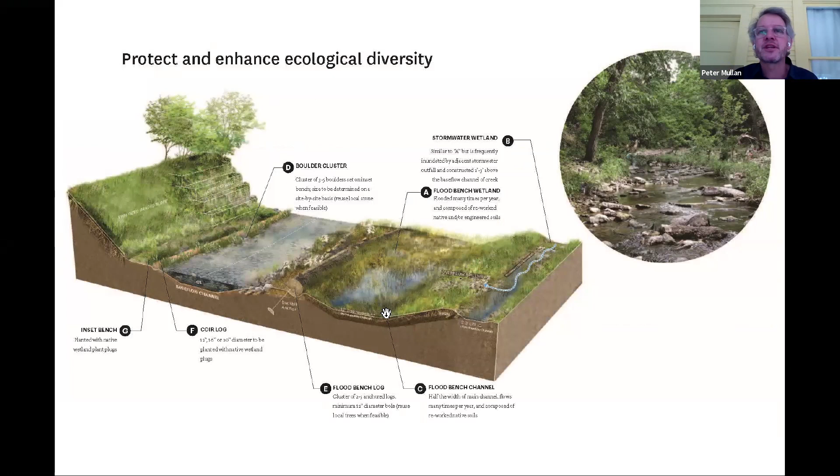So this site is really all about that creek restoration, creek reconstruction - going in and stabilizing the bank and then building it back up, but using natural materials and soft engineering solutions, stumps, dead wooden logs as a way to stabilize the stream bank, but also to provide habitat for a really diverse set of wildlife, creating places where the water moves at different speeds, because that again contributes to that biodiversity. So that's a whole project unto itself.

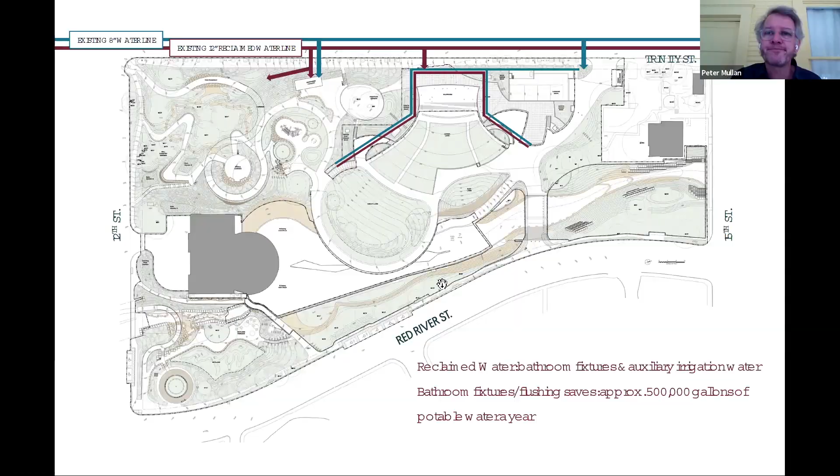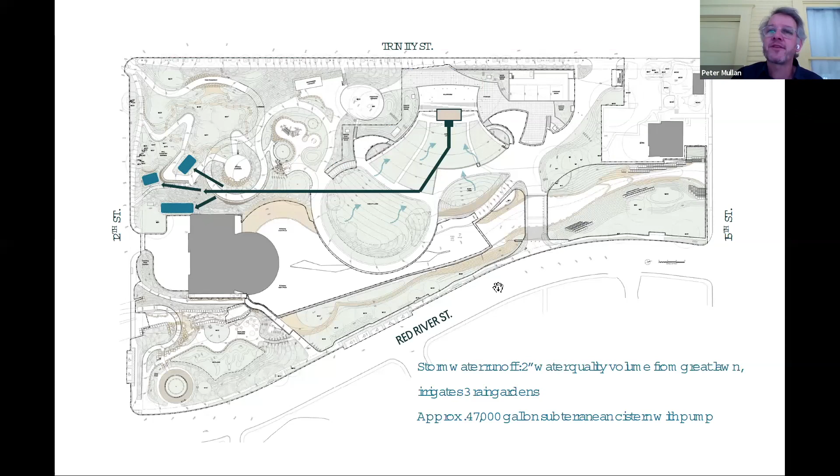We're also installing a lot of infrastructure under the ground. All the bathrooms on site, and we have a lot of bathrooms for the amphitheater, are being served by the city's Purple Pipe reclaimed water system. There's a giant cistern underneath the lawn, which then feeds a series of rain gardens at the southern part of the site. So again, we're keeping as much, if not all, of the water that falls on the site - it's best practice. And then all of that comes together and gets revealed as this landscape.

So as I said, we're well on our way here. We hope to be finished by the end of the year and open in the spring of next year, and hopeful that coincides with an opening up of the city in general, so that we can really use this as a place to celebrate that together.

So again, I want to thank the design community for its support over many years. The opening of Waterloo was really kind of a major milestone in the trajectory of the larger project. I think it's kind of a coming out party for us - I mean, I think the broader community is going to understand us better than ever before.

But really the design community has been crucial in supporting us and getting us to this point. I also want to thank all the members of the design team, many of whom I haven't mentioned, who have contributed to this incredibly complex project. I think it's something that I hope they're as proud of as we are.

So there's that list again. Anyway, thank you very much.

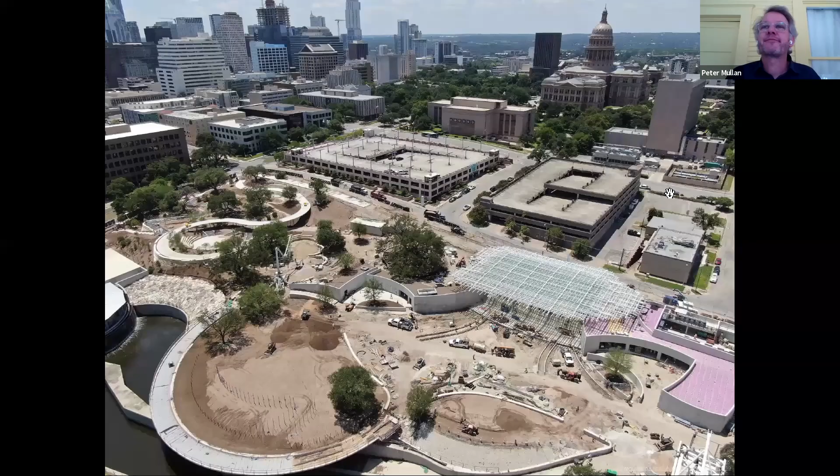Thank you so much, Peter. That was amazing. And what you're doing for Austin is just tremendous. I can't wait until this park is open, until the whole Waterloo Greenway project comes to fruition.

We have a question. Andrew Clements asks about the Capitol View corridors and how that history impacted the poppy being on top of the inlet structure. I think in the competition, the design team didn't truly understand the Capitol View corridors. When the issue about the inlet facility having violated the Capitol View corridor came out, they realized the poppy, as a very vertical element, was also not going to be compliant. Everybody was very attached to the idea of the poppy and what it represented architecturally, so the question became how do we adapt and evolve the design so it could retain that character and value and impact, but still comply with the Capitol View corridor requirements.